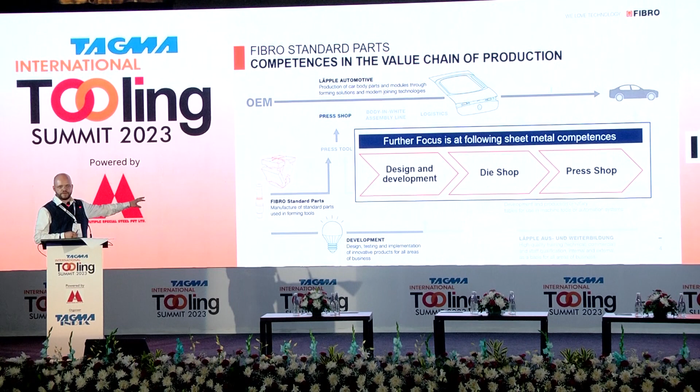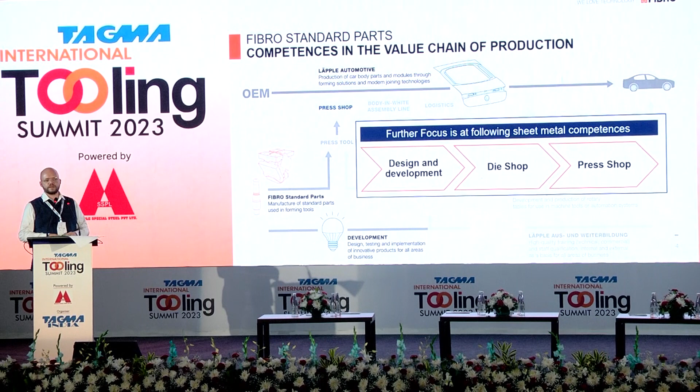We will take a look at how development in our group, combined with the standard parts division, can support the die shop, the tool and die shop, and furthermore the press shop, to help you get your return on investment through maximum strokes per minute and maximum production running time.

At the beginning, I mentioned efficiency. So what is efficiency? Efficiency is the ratio between the effort you put in—the costs—and the outcome. With this value, we measure how economic a situation is.

On this slide we see at which process step we have the most influenceability in regards of the costs. And it is, as it always was, during the design and development phase. With the arrows going from bottom to top, the length of the arrow symbolizes the influenceability of the cost.

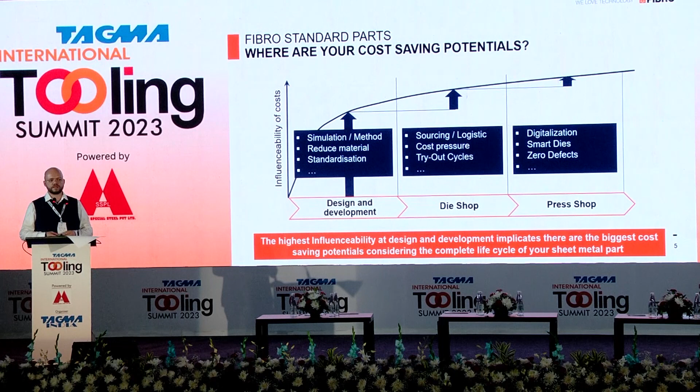So you see in the press shop, where actually you have to return your investment from all the steps before, you have very small influenceability of the costs. Everything has to run as planned, otherwise you're losing money. Later on, I will show you some small helpers, some hidden champions, regarding how you can improve zero defect production in your press shop.

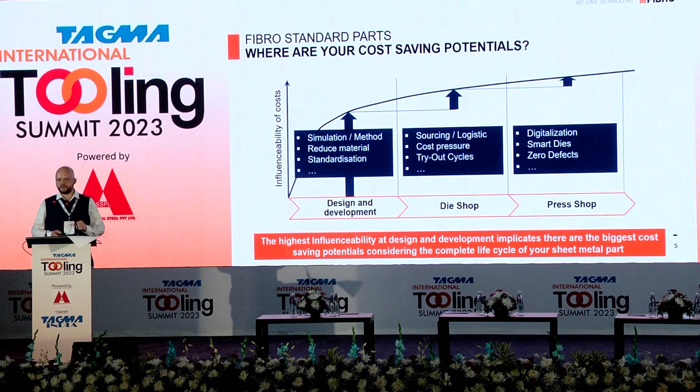But first things first—now I would like to show you from the beginning how, with simulation or state-of-the-art methods, you can influence your value stream, your production. I have a big example where I'd like to tell you a personal story, and afterwards something about reducing material.

So I went to China for the company in 2018. During that time we had several challenges, also due to the COVID virus. In the middle of 2020, I was coming back from China, and I was exhausted. Everything was very unplannable. The supply chain was an absolute catastrophe, and everything else too.

And then I read in the news something about giga dies. I read that now there is a technology on the market where before you had to press or produce around 70 single parts, and now with one stroke you have this part—talking about aluminum die casting. So what does this mean for the standard part business? What does this mean for our customers, for die shops and everything? So we see here a very, very disruptive technology, and we have to take care about it.

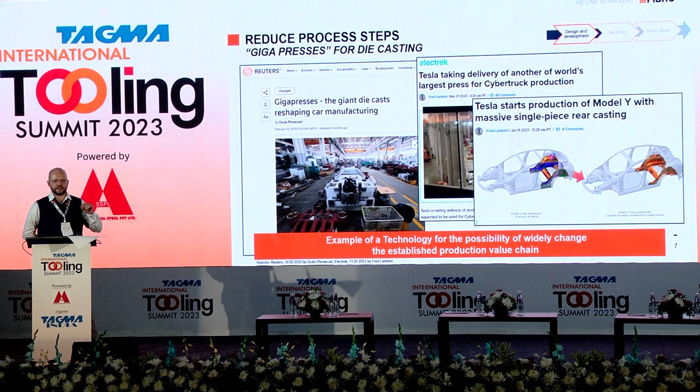So after some small talk, he introduced something to me where we also reduced the amount of dies in the process of creating a sheet metal part. And I told him, Martin, my good friend, please don't develop technology where you reduce the amount of dies, because then we will make less business with standard parts.

And bottom line is, now we know how we can participate, how we can support each other in regards of concepts where you reduce the amount of dies in a disruptive way.

We see here a development project where we were able to reduce, especially for spare part business, so when your press shop is not under full production and you just need some spare parts, here we have a solution. Just use one die, one single stroke.

The setup time in your presses is very small compared to that. You can use smaller presses. And compared to the casting technology, you can use it with your existing technology. You don't have to invest. So you can directly implement that in your value stream.

So should I speak louder? Pardon for that. Thank you for the feedback from the audience.

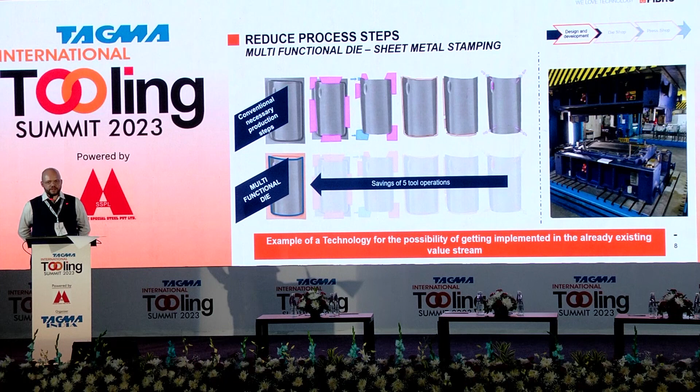A cam unit is one of the most essential standard parts you need in your dies. The cam unit will move the downward movement from your press into a lateral movement, so that you are able to punch, for example, holes in already bended shapes of your sheet metal part.

I would likely call it, personally, the king of standard parts, which means it's also the biggest standard part, which consumes the most space. So when we come to progressive dies, or also big line dies, when we have space issues, a cam unit is not always a cam unit.

There are cam units on the market. Here, with our Läpple Group internal Center of Excellence cam unit department, we were able to reduce the total volume of the cam unit from 100 to 70%. What does that mean?

You have 30% more space in your die, and you can use this 30% more space for other operations, for distance plates, for your guiding elements, or when it comes to smaller progressive dies, also for other operations.

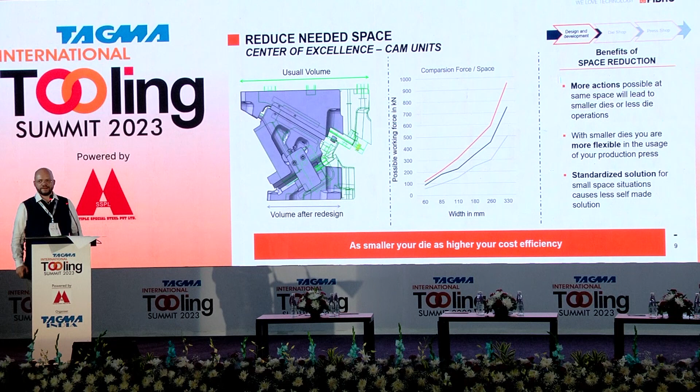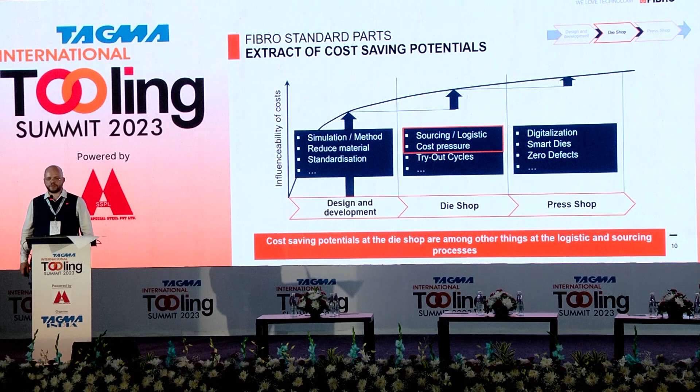Let's come to the second chapter. We go to the die shop. One of the most critical issues in regards of die shops, also according to my personal experience, is when it comes to tryout cycles. For sure you have your project plan, for sure you work with some buffers so that you are able to finish all the dies, but the tryout cycles are the most critical point.

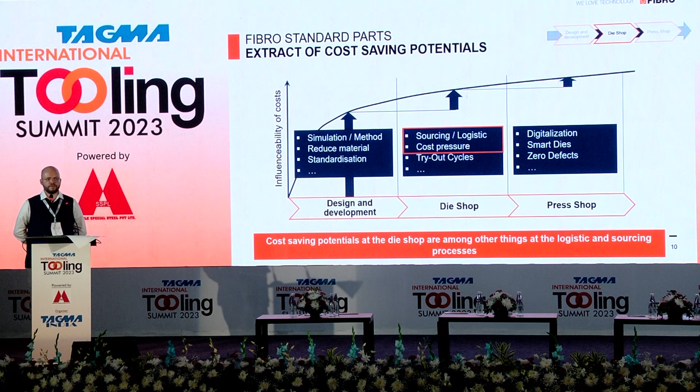So let's take a look at all the process steps we need to fulfill before the tryout cycle, like sourcing, logistics, and for sure also a main issue when it comes to die making is cost pressure.

Here we have an example from Germany, where we developed together with a Bavarian global OEM a commissioning service. We had some workshops there, and then the question was how we can help you to improve your incoming goods quality, checking your marking, and everything.

And we developed a service, therefore, for all of your inspiration, so that we were able to fulfill all the different active parts, all the standard parts, in combination with customer-specific parts, so all the parts where normally we need CAD data, like the cutting knives or some other bending steels.

We were able to fulfill, in a partnership way, that the customer gets his individual logistic box already with sorted parts. We already have marked them. We do quality control for him, and the logistic box just goes into the die shop. No part is missing, and in the die shop it goes directly to the workbench, and the people can immediately start to assemble the die.

So before, when there was a problem, the customer had to call 6 different phone numbers, and now only calls 1 phone number, and this person is responsible for everything.

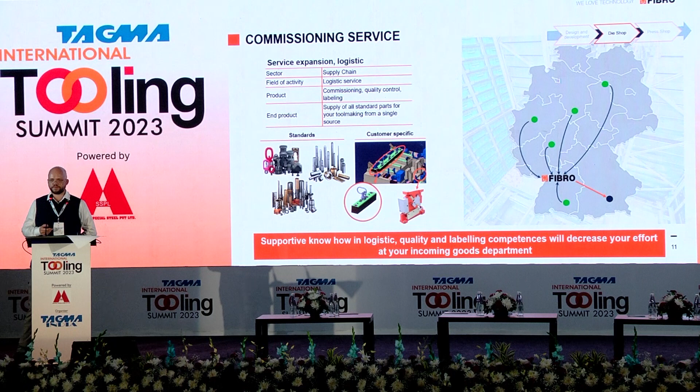Let's take a look at the second part. When it comes to standard parts, welcome to the world of standard parts, where we have for every individual customer their own standard. To fulfill all this need on a global way, we have to track 40,000 different article codes.

So when it comes to an individual customer's standard parts, it's for sure deducted. During COVID, I made an analysis that at the average side panel die, we have around 400 different article codes. In our product range, doesn't matter which standard you have, there is a high chance that with our broad product portfolio, we can handle it.

When it comes to global supply chain, what's also important for you as a die maker is starting at the right time with your tryout cycles, that you have the same support you'd have where you're based in your local area, for example in India. You need a partner which is also in the countries where you supply your dies. This is very important for your die making when it comes to tracking the project, solving the problem when it comes up, and starting at the right time with your tryout cycles.

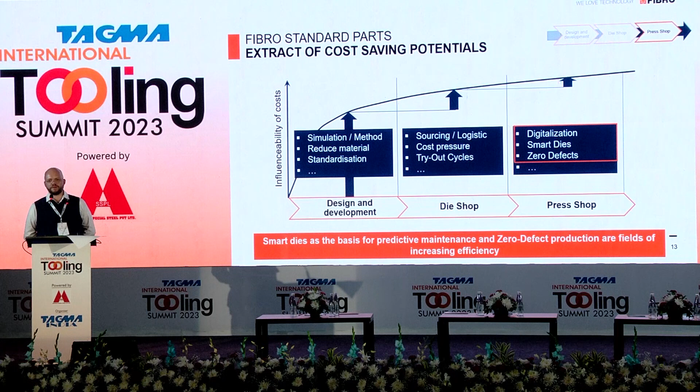I have some inspirations for you regarding digitalization. I think it's 4 weeks ago that FIBRO India got the certification for the WPMS sensor technology, to import it into the country from the government. So we are now safe regarding all the certifications, and we can start with that. Let's imagine I will speak with you regarding gas spring leakage, and stuff like that. And at the end, one of my favorite points: smart little helpers. The best solution is a small solution.

Coming to the point of digitalization. Here we see a gas spring. When the cam unit is the king of the standard parts, the gas spring is your queen. According to my personal experience, this is also one of the most critical parts. It's filled with gas, filled with 150 bar pressure of pure nitrogen, so you have something like a pressure device, like a gas bottle. The function of this product is: when you have leakage here, when the gas is flooding out of the gas spring, you get wrinkles in your sheet metal. So the task of this product is to have the correct force - the correct drawing force, bending force, or holding force - in the correct area of your die, so that your mostly drawing processes are as stable as possible.

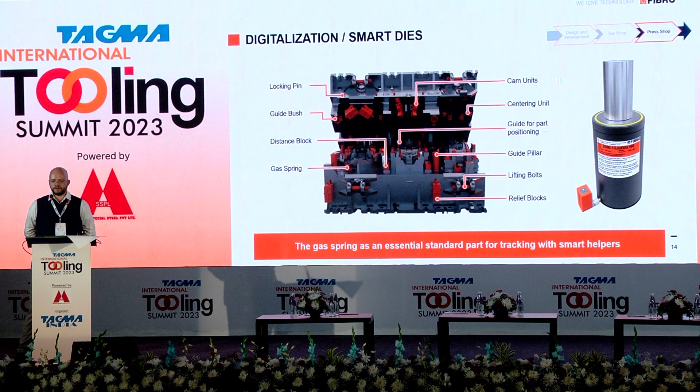Let me introduce to you a sensor technology which is able to track the status of the queen of the standard parts, the gas spring. We see here on the left corner, the die where the gas spring is mounted. The sensors are directly mounted at the gas spring, and they communicate either with a gateway, which can directly influence your press line, or with a software where your maintenance engineers can see it, where your production planning can see the status of the gas spring, and it could also be communicating, as you wish, with a cloud to store all that data.

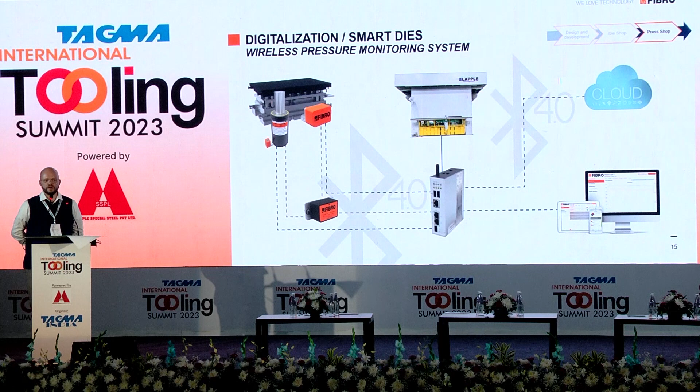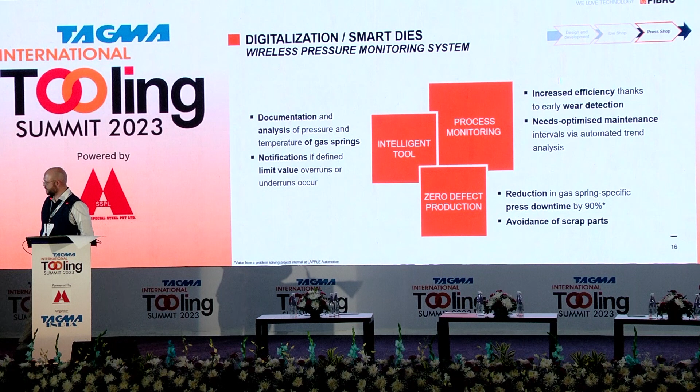We are tracking heat and pressure. So what's your value about tracking heat and pressure? For example, your production planning department decides, now I have to produce this part. Imagine you were able to just check on a laptop or on the software whether the gas springs in this die are okay, whether you can run the production. If you're at green value, you can go directly into production and don't lose time by potential waste of setup time, which doesn't make sense. You are also able to check if time is up - I don't think so, so I keep on moving - okay, sorry, 5 minutes? Thank you for that.

Digitalization in the press shop.

A very convenient way to use this technology is with your smartphone. Your smartphone is everywhere with you, going to lunch break, going to the toilet, you have your smartphone with you, right? So imagine the die sends you an email or a pop-up that this die is not able to go into production.

Due to a pressure value which is not able to fulfill the needs in production. Or when we combine the cloud with the software, we can also look into the future. Based on a mathematical algorithm, the system learns from the past, what the pressure decrease is, what the natural leakage of the system is, and then it tells you in 2 or 3 months you have to do maintenance, fill up the gas springs or whatever.

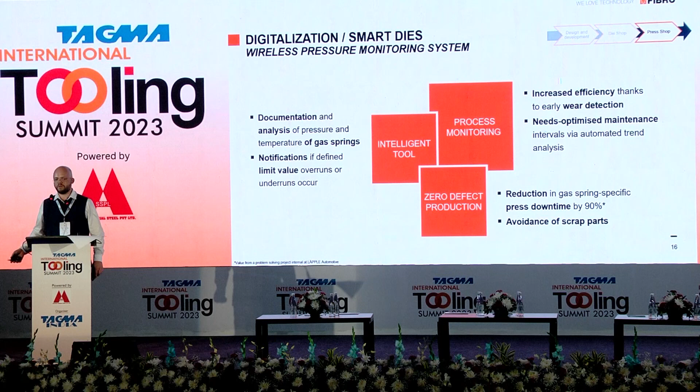When it comes to transfer presses, or if you increase the strokes per minute, we have more stress on these screws. They break, fall into your die, destroy something, and in the worst case destroy your drawing contour, your shape, and then it's back to maintenance: welding it up, working it in, trying it out, and then again.

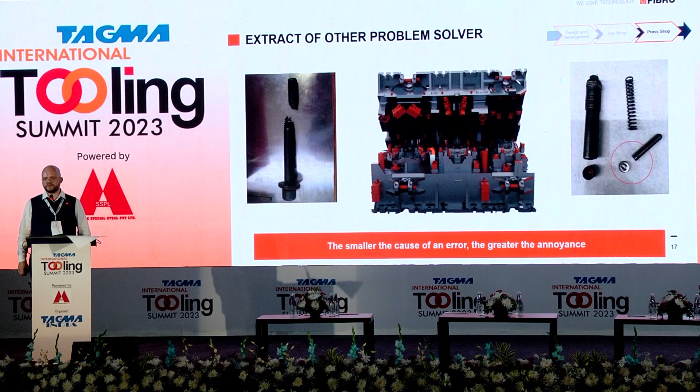On the right side, even worse, it's a 6mm pin from a spring plunger which also breaks and falls into your die. I would like to inspire you with some solutions.

When it comes to breaking spring plunger bolts, there are also other technologies existing on the market. The basic version is a 55 HRC hardened pin, so it will make damage, you will see it in the area. We have a solution here with a high sophisticated plastic pin.

The plastic pin contains a metallic material, like graphite, so you have a greasing function, and the bolt breaking issue is checked, no problem for the press shop anymore. The best thing is you can also interchange it with existing dies, because we fulfill the global standards for this product, M16 with the right pitch, length, force, and stroke length.

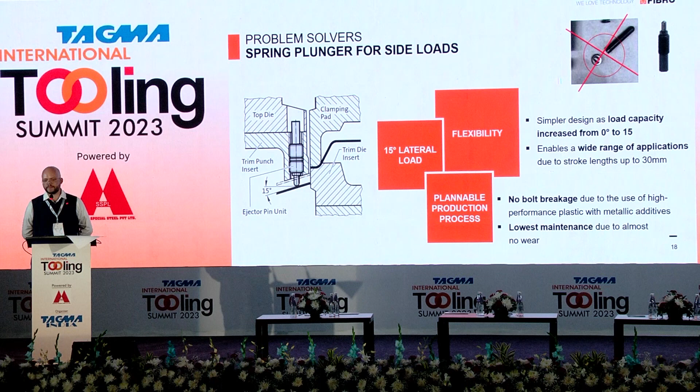When it comes to breaking blank holder screws, there was a time many years ago when conventional press technology switched to transfer dies. We faced this together with a big press manufacturer: I want to sell my presses, but the customers ask me, will your press destroy my die, or will it destroy the standard parts in the die? I cannot sell the presses if I don't have an answer for that.

Normally we use a polyurethane spring. Polyurethane is developed as a spring material, so a spring gets energy inside and gives energy outside. Now we have the damping version, a material especially developed not for damping in general, but specifically for damping steel on steel products in the press shop environment.

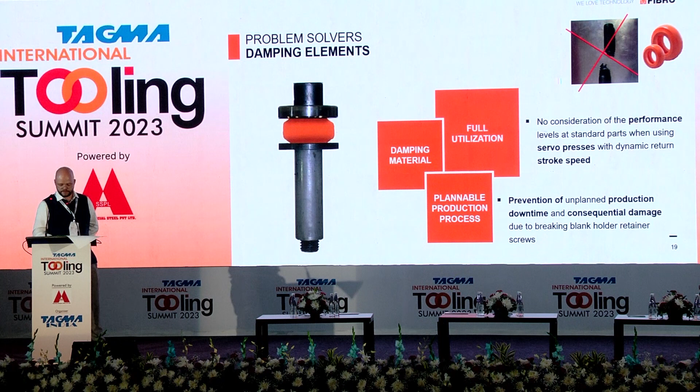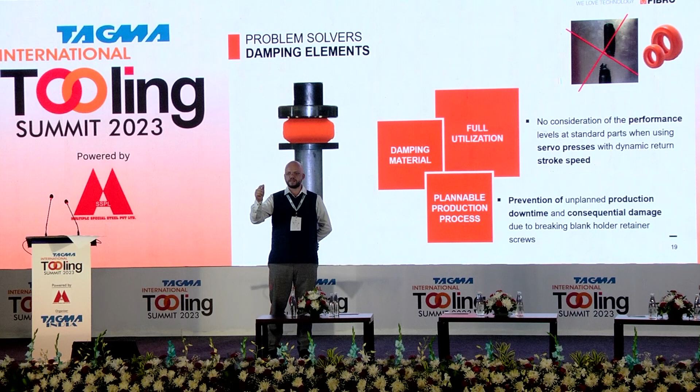Maybe the people in the back cannot see, but for the audience in front, I have here two different materials: the spring version, spring material, energy inside, energy outside; and this, the damping version, where energy inside is converted to heat.

Coming to the end of the presentation, second last slide. What have we seen? Let's summarize. We have seen several approaches regarding how, in the die design phase, you can have influence. What are the latest trends? What challenges are we facing in the future?

We talked about design, about tool and die manufacturing, tryout cycles. In my personal opinion, this is the most critical point, the least influenceable point. Then in the press shop, one of the most important things is return on investment. You have to run your dies, so you have to consider 24-hour production, highest strokes per minute as possible, in all the areas before.